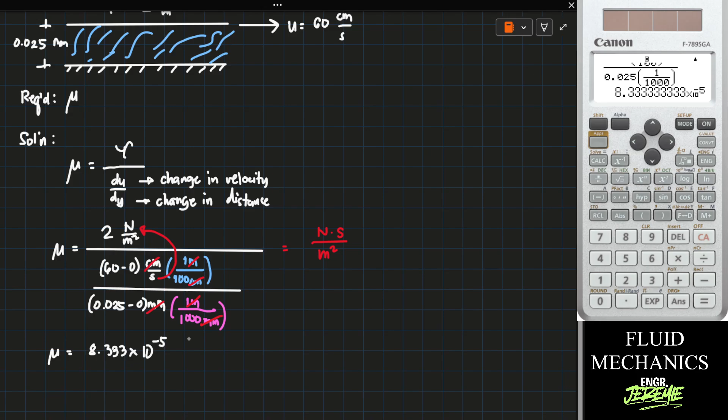So, unit analysis tayo. Makakancel yung cm, makakancel yung mm. Ito, nasa numerator din to. Ayan, makakancel yung meter. Itong second, since nasa denominator of a denominator, tataas, magmumultiply sa Newton. So, ang matitira na lang is Newton second per meter squared, which is yun yung unit natin for dynamic viscosity. So, therefore, ang unit nito is Newton second per meter squared or Pascal second. Parehas lang naman yan. So, this is already accepted as our final answer.

Or kung ililipat naman natin into poise, knowing that 1 poise is equals to 0.1 Newton second per meter squared. Pwede rin naman kasi nating i-convert. Multiply natin to ng 1 poise over 0.1 Newton second per meter squared. Para makancel ito, ang makukuha natin is naka-poise. Ang final answer tuloy natin is in poise.

So, i-divide lang natin itong sagot natin by 0.1. So, ang sagot is 8.33 times 10 raised to negative 4. 8.333 times 10 raised to negative 4 poise. So, ito yung ating final answer for mu. Okay?

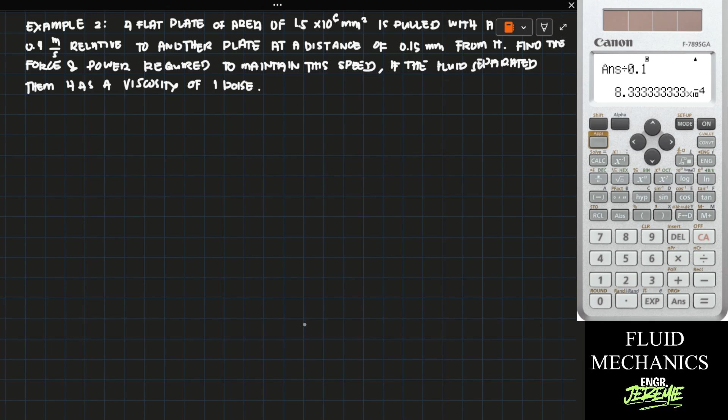Another example. Example number 2 tayo. A flat plate of area 1.5 times 10 raised to 6 millimeters squared is pulled with a speed of 0.4 meter per second relative to another plate at a distance of 0.15 mm

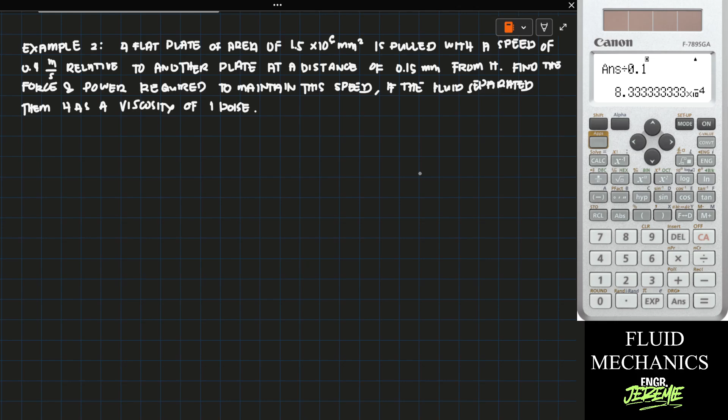from it. Find the force and power required to maintain this speed if the fluid separating them has a viscosity of 1 poise.

Okay. So, meron daw tayong ulit dalawang plate pero this time may area na. So, drawing na lang din ulit natin. So, given, yan yung isang plate natin. Ito yung isa. Itong plate natin na to is hihilahin natin. We will pull this. And yung area is equals to 1.5 times 10 raised to 6 millimeter squared.

Okay? So, pag hinila daw natin to, ang bilis nito is 0.4 meter per second. And yung distance between them, 0.15 mm. Find the force and power required. Okay? So, may given tayo na viscosity which is 1 poise.

So, syempre, ang solution nito, gamitin ulit natin yung poise natin. Kasi ang required dito is yung force and power. Yung force, makukuha lang naman natin yan dun sa shear stress, knowing that viscosity is equals to the shear stress over the velocity gradient. So, meron naman tayong change in velocity which is yung 0.4 and 0. And yung change in distance naman natin is itong 0.15, since yan yung thickness ng fluid natin. So, ito given,

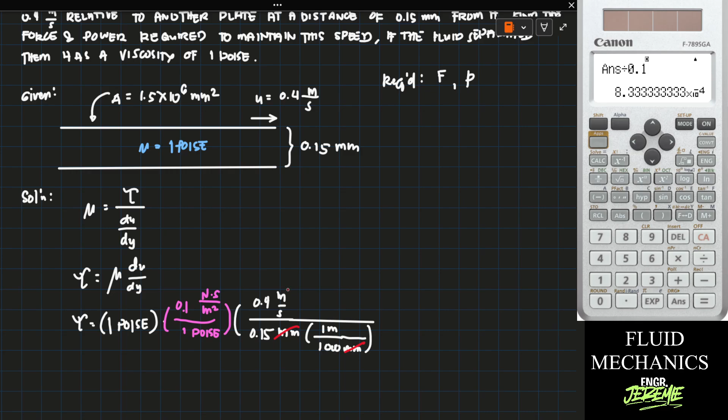Times, convert natin ito. Ito nandito sa ilalim. Convert natin ito. 1 meter over 1,000 mm. Baliktad, sorry. Sa ilalim yung 1,000. So, maka-cancel out yung mm. Itong meter, maka-cancel. Itong poise, maka-cancel. Itong second, maka-cancel.

So, ang matitirang unit natin is Newton per meter squared. Tama? Since ang hinahanap natin is shear stress. So, matitirang unit is Newton per meter squared.

So, calculator. 0.1. Di ko na isasama tong 1 at 1 na to since 1 naman na yan. Times 0.4 over 0.15. I-divide ko na lang ang 0.15 ng 1,000 since may over 1,000 tayo dyan. Close. Then, equal. Makukuha natin yung shear stress natin as 266.67.

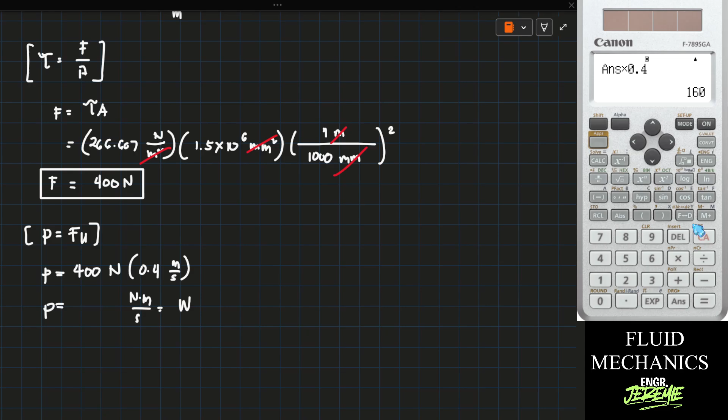So itong 400, i-multiply natin ng 0.4. So makukuha natin yung sagot as 160 Newton meter per second or 160 watts. Parehas lang yung sagot dyan. So, yan yung sagot natin for example number 2.

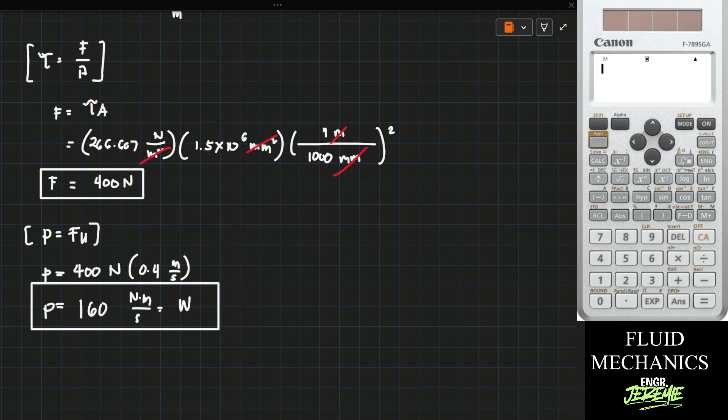And example number 3, isa pa. So, here's now the example number 3. Find the kinematic viscosity of an oil having a density of 981 kilogram per meter cube. The shear stress at a point in oil is 0.2452 Newton per meter squared and the velocity gradient at that point is 0.2 per second. So, pinapahanap sa atin is

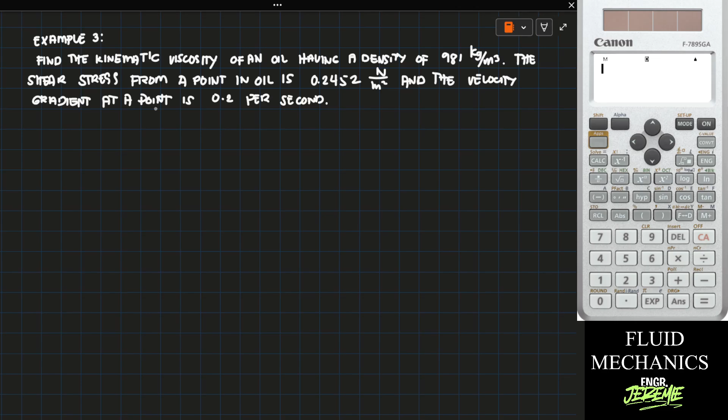the kinematic viscosity. Now, given sa problem, we have the density rho, which is 981 kilogram per meter cube. We also have the shear stress, which is 0.2452 Newton per meter squared, and we have the velocity gradient, yung du over dy, which is equal to 0.2 per second.

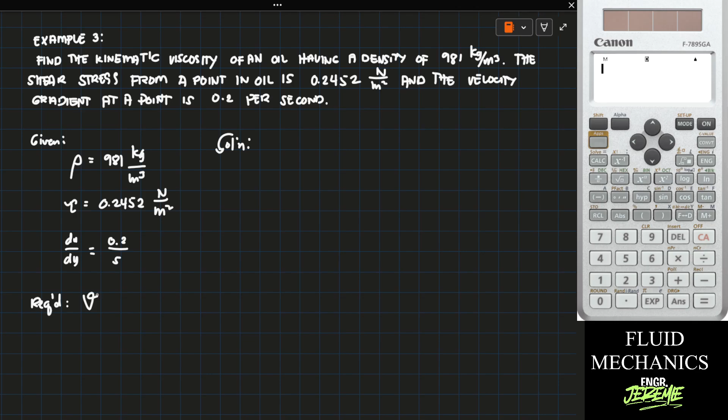Okay? So, solution, madali na lang to. Ang pinapahanap is the kinematic viscosity. Meron naman tayong formula for kinematic viscosity which is equal to the dynamic over the density. Ang problema natin, wala tayong dynamic. So, gamitin natin muna yung formula natin for dynamic na shear stress over du over dy.

So, dynamic is equal to shear over du over dy: 0.2452 Newton per meter squared all over our velocity gradient na 0.2 per second. So, yung per second tataas doon, magmumultiply sa Newton. Kaya magiging Newton second per meter squared ang unit natin. Ang unit ng velocity gradient is per second lang. Clear natin?

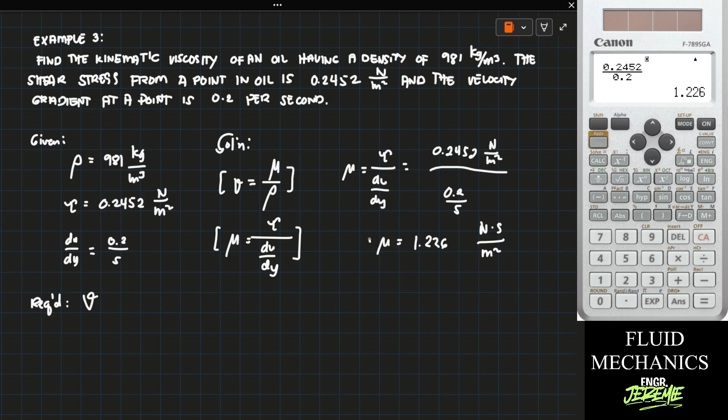0.2452 divided by 0.2 per second. So, equal. Makukuha natin yung sagot natin as 1.226 Newton second per meter squared. And then, saka natin to gamitin para makuha yung kinematic. Given na density na 981. Solving for kinematic, we have mu over density: 1.226 Newton second per meter squared all over 981 kilogram per meter cube.

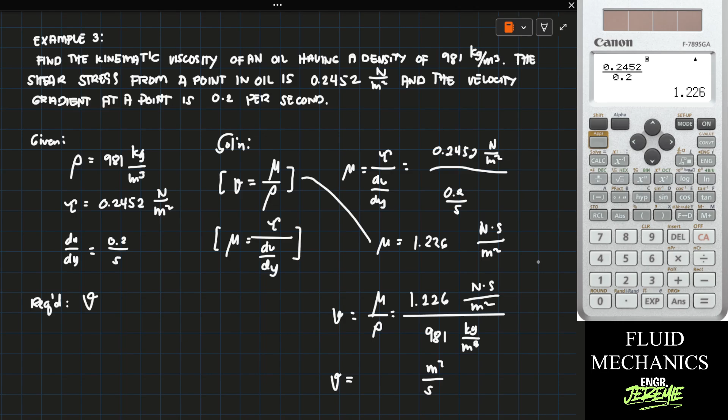Kinematic, ano nagiging unit nito? Naka-meter squared per second. So, yung 1.226, i-divide natin ng 981. Makuha natin yung sagot na 1.249 or 1.25 times 10 raised to negative 3 meters squared per second.

Now, i-convert natin into Stokes. Conversion natin, 1 Stoke is 10 raised to negative 4 meter squared per second. Makakancel yung meter squared per second, maiiwan is Stokes. Kinematic viscosity, itong sagot na to, i-divide na lang natin ng 1 times 10 raised to negative 4. Ito kasing E na yan, exponent yan, parehas lang.